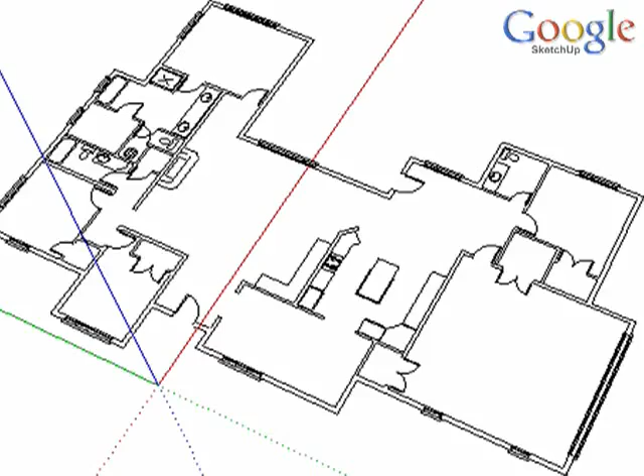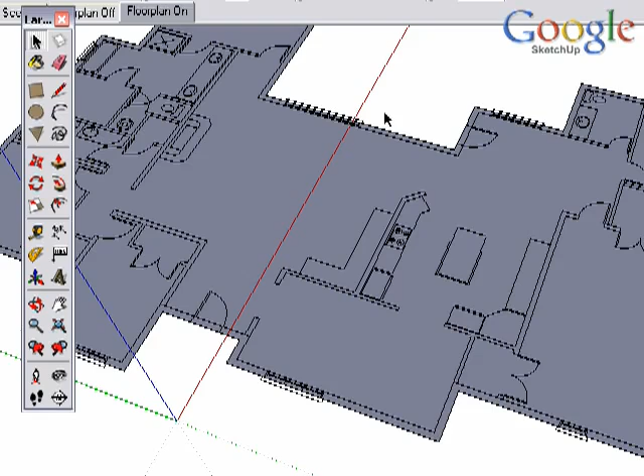There are many strategies to working with CAD files in SketchUp. This video introduces our recommended method, though we encourage you to tailor these techniques to best fit your workflow. Keep in mind that although this information should be useful to any SketchUp user, we will progress through the steps assuming you have a basic knowledge of SketchUp tools.

Start by going to the File menu and choose Import. Find the CAD file on your computer and open up the options. Check both of these boxes and leave those on by default.

Set your units to match the units you had in your CAD software. Preserve drawing origin is important if you're going to bring in multiple CAD files. Make sure under Files of Type that you've chosen AutoCAD Files so that you can see the CAD file to bring in. SketchUp will share some import information with you.

Close that dialog box. Now let's examine the model. The first thing that you should consider and get in the habit of doing each time you import a CAD file is to check the physical size of the imported CAD file.

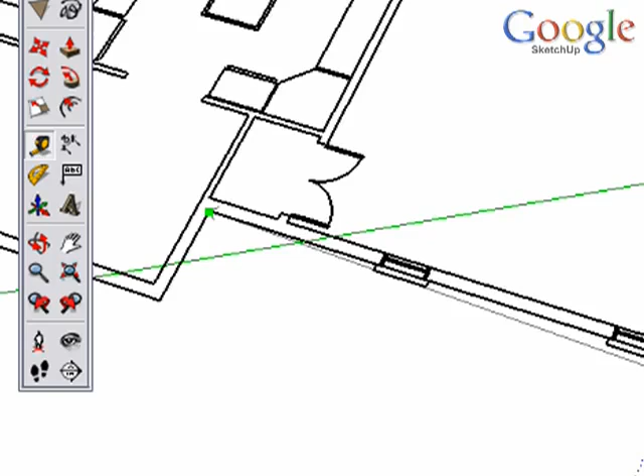Use the tape measure tool and measure something you know. I know this wall would measure at 5 feet, and so it's at the correct size.

However, often your CAD file will come in and it will not be at the correct size. If I measure this wall, it measures at 27 feet 6 inches. You can actually resize models in SketchUp by typing in a new dimension and pressing the Enter key.

I made that wall 5 feet. I'm going to measure this wall again, type 5 feet, and now I know that it's at the correct size. So you can use the tape measure tool to resize the model if it's incorrect.

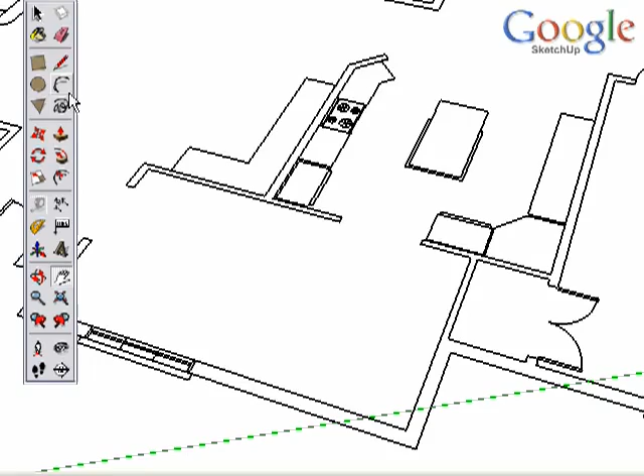Now this is a previous method for using CAD files. You trace over an edge, creating a surface, and then be able to pull that up. Now this creates some unnecessary lines that you need to clean up. Usually that's not too big a problem.

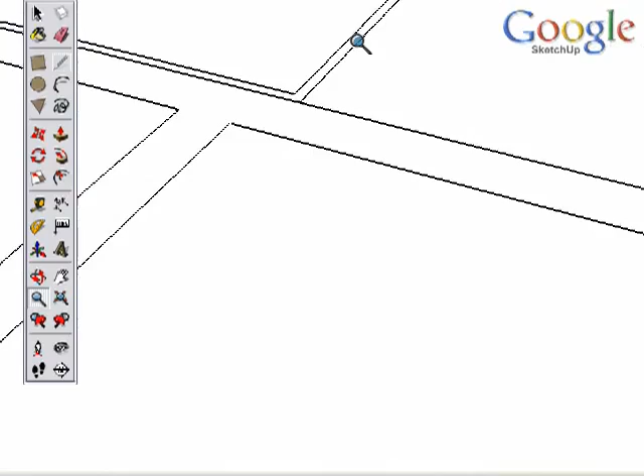The problem comes here. As you're working around your model and trying to create surfaces to pull up, sometimes it doesn't work. As we trace over these edges, nothing happens. And here's why. Zooming in reveals that in fact these two edges don't meet. There's a little gap there, and SketchUp requires that we have a full closed loop of edges to form a surface, and that's why a surface couldn't be created.

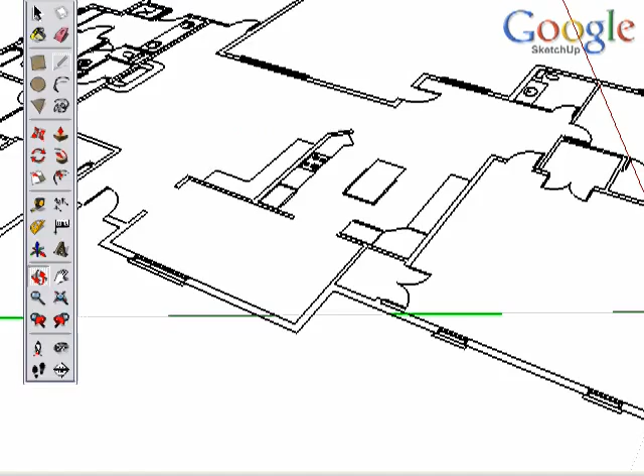Those little gaps tend to pop up all over in CAD files, and they're very difficult to find and just cause general problems. For that reason, we recommend the method that we create this CAD file as a group and use it as a reference only. We're not going to use it to create the geometry, we're only going to reference it and create a model on top of it.

I'm going to import this CAD file again. You'll notice that there was nothing existing in the space before, and as you see, it brings it in as lines and edges, components out of things that were blocks in CAD. So I'm going to select it all and create a group.

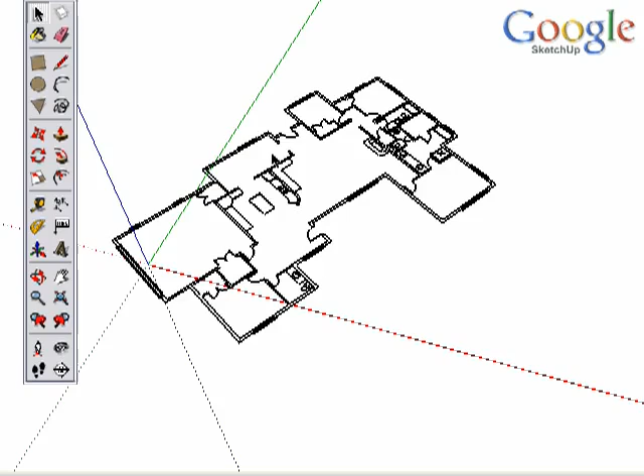We'll start a new file and show you what happens if you import a file and you have existing geometry. Let me draw a line. So now we have something existing in the model, and we import the CAD file. And what you'll see is it's grouped automatically, the CAD file. Before it was not grouped, and we had to make it a group, and in this case it is grouped.

That's just so that you understand when things are grouped or not when you bring a CAD file in. If you have anything existing, your CAD file will be grouped automatically. Otherwise it won't, and you'll need to group it yourself.

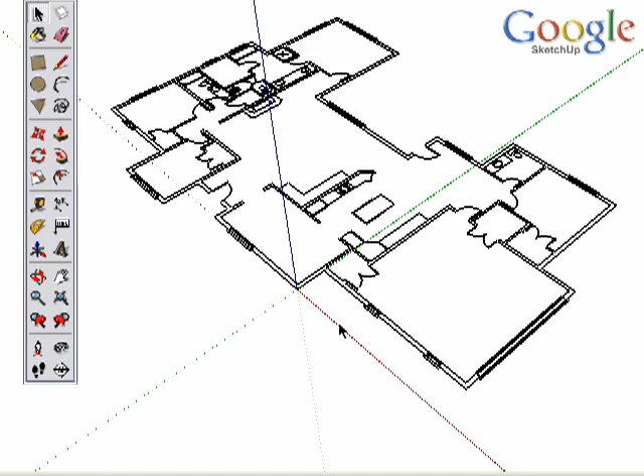The next thing we should do is line the axis up with the CAD file. We can do this with the axis tool very quickly and easily. Or as an alternative, if we left the axis in its default position, we could rotate the model and line it up with the axis.

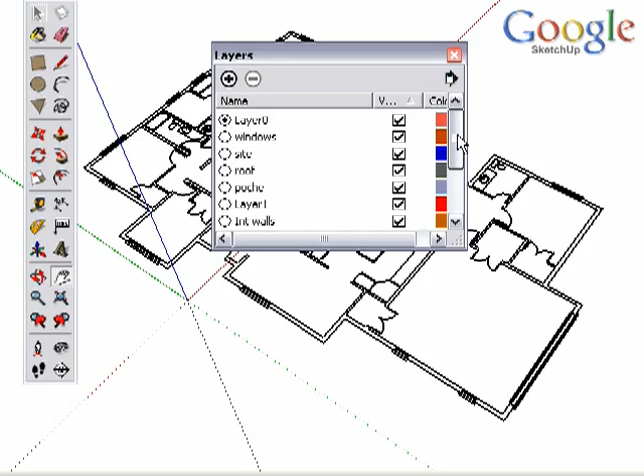Now let's look at the layers. When you bring in a CAD file, it brings in the many layers that you've created in your CAD program. These layers can cause a problem if we leave the geometry on all these different layers.

So what we recommend is that you select all the layers that came in. You can see layer 0 at the top. Select all the layers that were brought in with the CAD file, everything except layer 0, and delete them. And choose Move Contents to Default Layer.

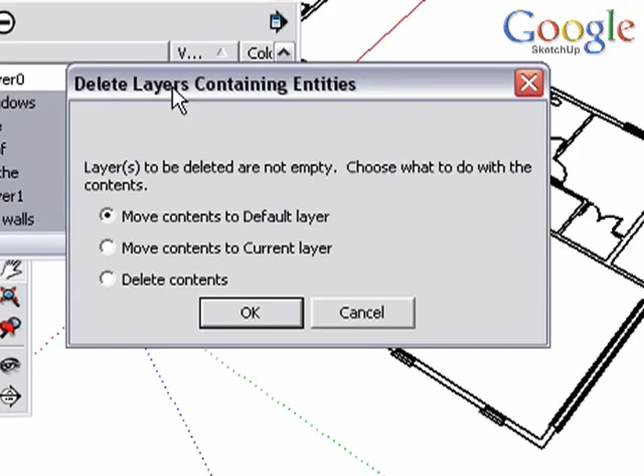In this way, we won't delete anything that we've imported, but we move all the geometry to one layer, the default layer 0.

Now let's create a new layer. We can name it Floor Plan, and we'll move this group to that layer.

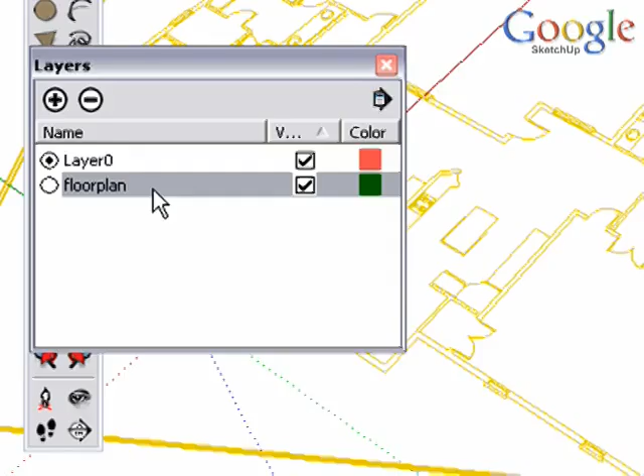Bring up the entity info for the group, which you can do through a right or context click menu, and under Layer, choose Floor Plan to move it to that layer.

Now in the Layer dialog box, we can turn the visibility of the layer on and off. This will become very useful, especially as it's a reference only, and we can turn that reference on and off.

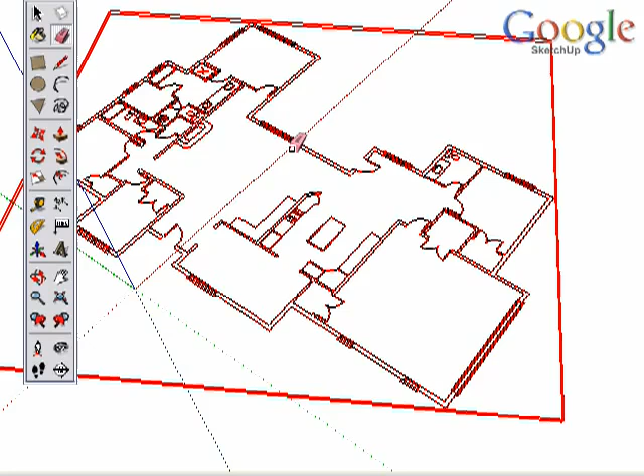Right or context click on your group and choose Lock. Now we can't erase or otherwise manipulate our reference layer.

Another setting that you might want to change is the style. Open the Styles dialog box and choose the Edit tab. And under the lines, you can see we can turn the profiles on or off. Depending on your personal preferences, you may want to turn the profiles off, or you can thicken them up if you like. For our purposes, we're going to turn them off.

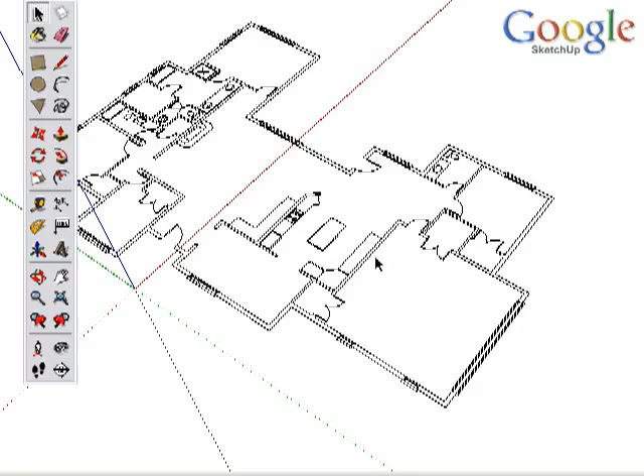The final step we'll take in preparing this model is to bring up scenes and associate these scenes with the layer visibility. Again, you can find under the Window menu, Layers, Scenes, and other dialog boxes.

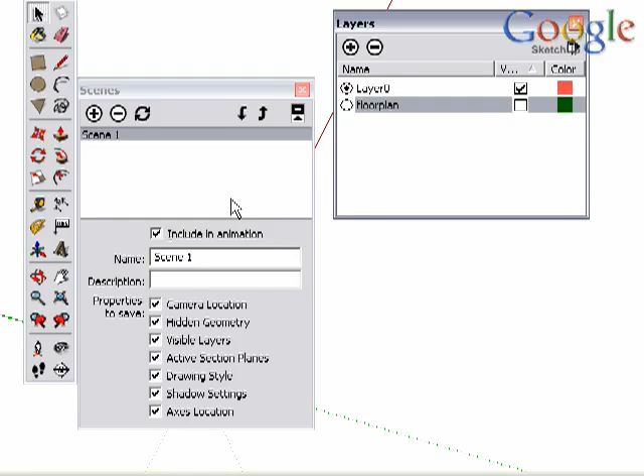In the Layers dialog box, I turn the visibility of the floor plan off. And in Scenes, I'm going to turn off all of the properties to save except visible layers. I only want to affect layer visibility.

And add a scene. Rename it. And press Enter. And now I have a scene with the floor plan off.

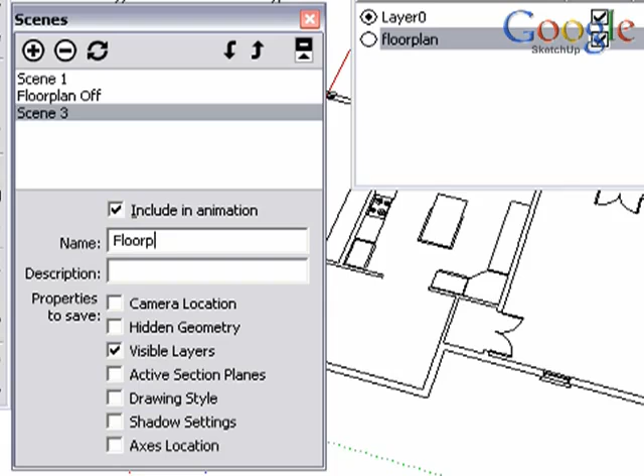In the Layers dialog box, turn the visibility back on and add another scene. Rename it. And now we have two scenes so that we can easily toggle the visibility of the floor plan on and off.

We've taken a few minutes to set this floor plan up correctly. After you've done this a few times, it becomes a very quick process to set up your CAD plans. Let's review the steps and then watch our next video to continue.